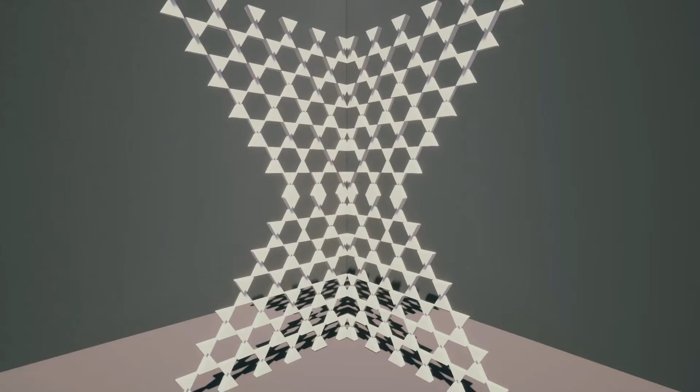Thinking of a problem, an issue, a situation, or condition within the bounds of the built environment, we came up with Pollutile. This is a simple construction material to give answers to our chosen problem in the community condition, which is smog.

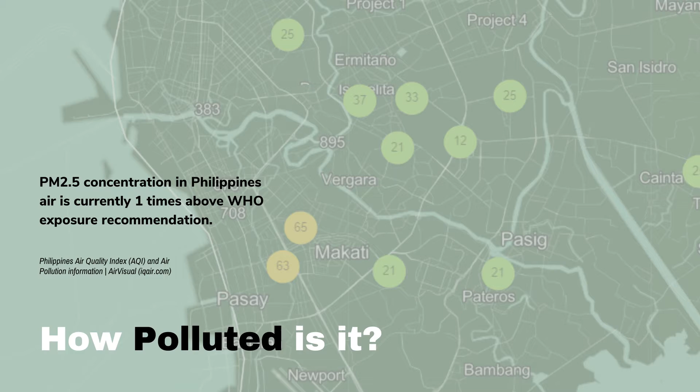Heavy pollution, such as smoke fog, in major roadways in the Philippines harms the environment and the people every day. According to AirVisual, the Philippines has moderate pollution with PM2.5 concentration. Philippines air is currently 1 times above the WHO exposure recommendation.

And as of August 5, 2021, the Live AQI City Ranking ranks Quezon City as the most polluted city in the country, followed by Makati, Naga, Davao, and Batac, Ilocos respectively.

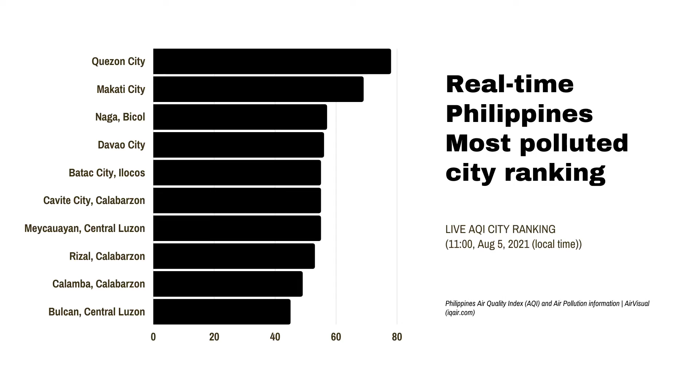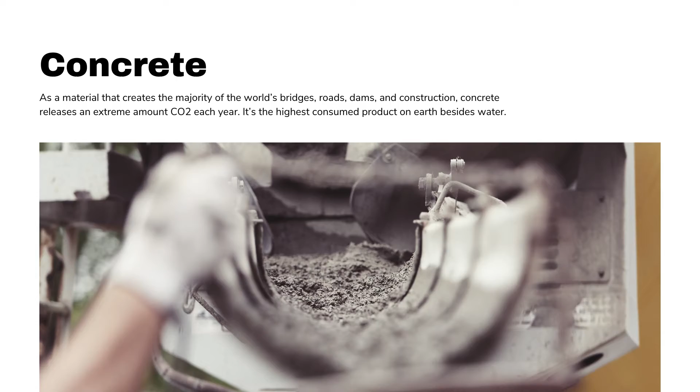Our chosen material with potential for innovation is regular concrete. Concrete production is responsible for 8% of global greenhouse gas emissions, and as populations continue to grow, demand for concrete continues to rise.

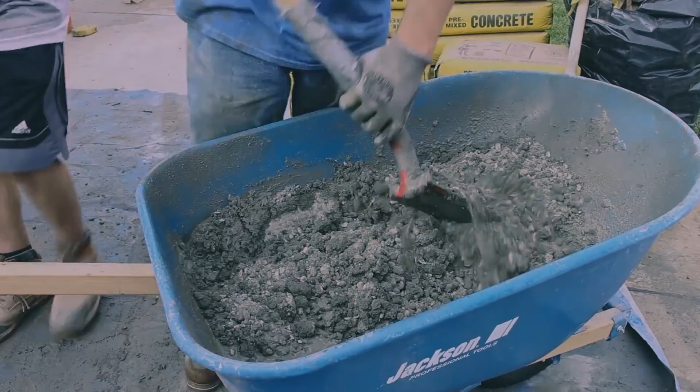In order to evaluate the environmental impact and resources used throughout the production and application of the material, here's the life cycle of a concrete, starting with the exploitation of the raw materials and ending with the recycling or disposal of the demolished concrete. Basically, it addresses the environmental impacts of the concrete from the extraction and production of raw materials, and also the production phases of the concrete with the choice of the most suitable mixture for a particular strength and situations of use. The end-of-life scenario of CRC, or the completely recyclable concrete.

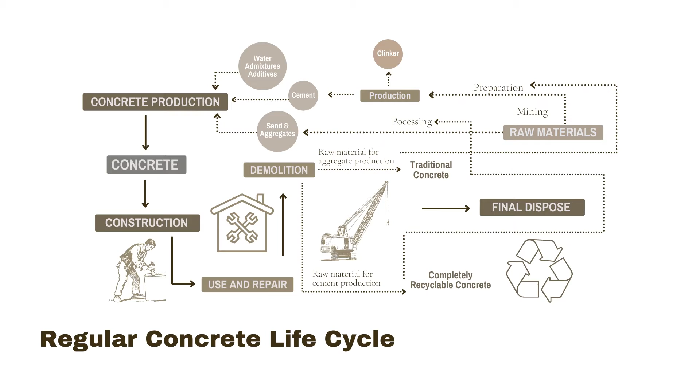All concrete waste is recycled within the cement production process, while for the traditional concrete, the waste scenario was divided according to 2 alternative routes, which include the recycling as concrete aggregate and the final disposal. So overall, the environmental impact of the concrete production process was found to be strongly related to its binder content and its required transport.

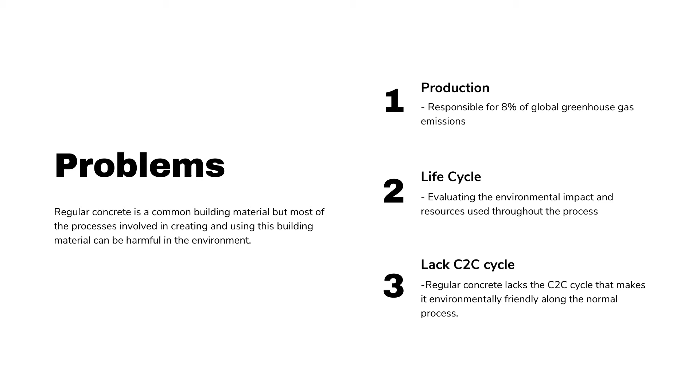Knowing the properties and life cycle of our chosen material, we break down the problems into 3 points. First, product-wise, concrete is responsible for 8% of global greenhouse gas emissions, which is concerning nowadays, especially since the world is at high risk of global warming. As we evaluate the environmental impact and resources used throughout the process, we realized that the procedure in the life cycle of regular concrete could not be reused or repurposed again, which leads us to our last point: that regular concrete materials lack a C2C or cradle-to-cradle cycle to reuse the concrete again and return it to the earth.

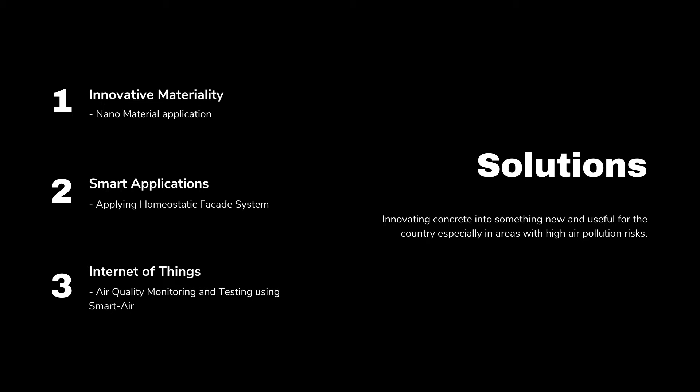To answer these presented problems, we will give 3 keys that would be essential for a proposed innovation with regular concrete material. First, innovative materiality, which involves nanomaterial application, which in theory would play an important role. And second, by also integrating smart materiality like a homeostatic facade. And lastly, third, in the wake of the digital revolution, we will apply Internet of Things, particularly air quality monitoring and testing using applications like Smart Air.

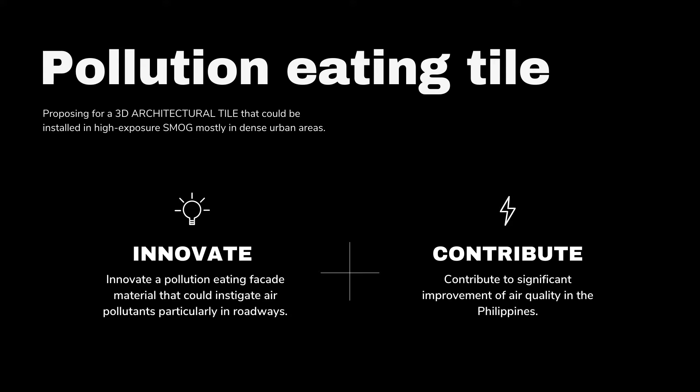Thus, Atelier A aims to innovate concrete into something new and useful for the country, especially in areas with high pollution risks, by creating a pollution-eating facade material that could mitigate air pollutants, particularly in roadways, and contribute to significant improvement of air quality in the Philippines.

Introducing nanomaterials to Pollutile, we explore photocatalytic concrete with titanium dioxide. This is fabricated by adding the photocatalytic titanium dioxide into conventional concrete. And this can help remove air pollutants, providing clean air in our cities and towns.

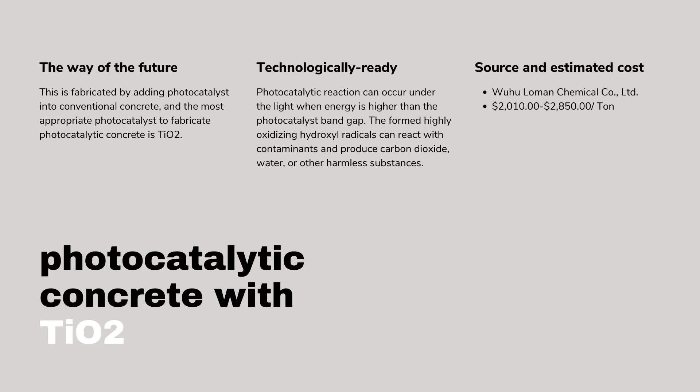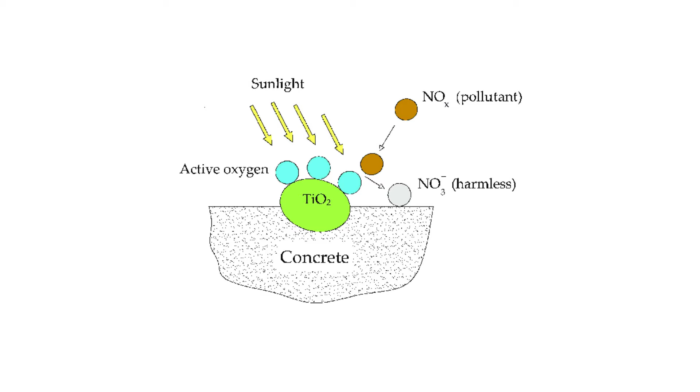Integrated with superfine titanium dioxide, which is a white permanent pigment, popularly used as a raw material in several downstream industries such as paints, paper, toothpaste, plastics, inks, and other products. Due to its whiteness, opacity, and refractive index, titanium dioxide is an important component in paints and holds about 25% share in the total content of paints.

It is a chemical that can remove 88 to 97% of nitrogen oxide pollution from the atmosphere. Photocatalytic reaction can occur under the light when energy is higher than the photocatalyst bandgap. The formed highly oxidizing hydroxyl radicals can react with contaminants and produce carbon dioxide, water, or other harmless substances.

This material could be sourced in the market through importation of titanium dioxide from Wuhu Loman Chemical Limited Company with an estimate of $2,010 to $2,850 per ton.

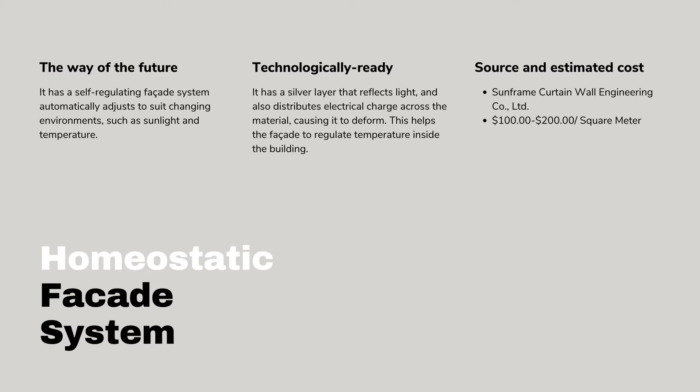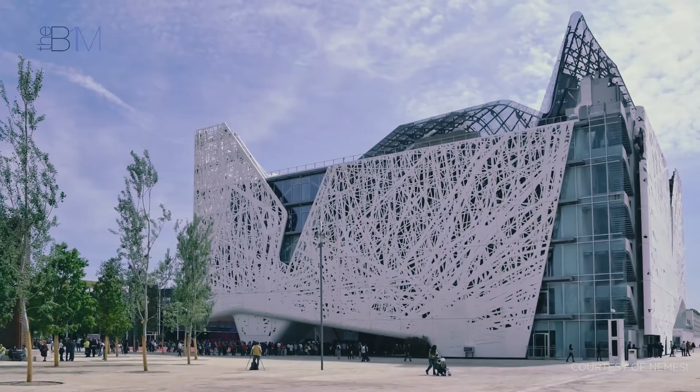Applying smart materials to Pollutile, we incorporate the concept of homeostatic facade system. It is inspired by the compression of human muscles and homeostasis in biological systems. Homeostatic facade system regulates the building's climate by the process of self-shading. It has a silver layer that reflects light and also distributes electrical charge across the material, causing it to deform. This helps the facade to regulate temperature inside the building.

Pollutile could be a component for an interactive wall collecting smog data on highly exposed surfaces. This could be locally sourced and made through companies like Sunframe Curtain Wall Engineering Company Limited, costing about $100 to $200 per square meter. As we go on, we explore the potential opportunities with the Internet of Things.

This is the interconnection via the Internet of computing devices embedded in everyday objects, enabling them to send and receive data. It is the process of sampling and testing of air emissions. It helps to understand the quality of air by pollutants over a period of time. It also gives trends and patterns about air quality, whether it is improving or degrading.

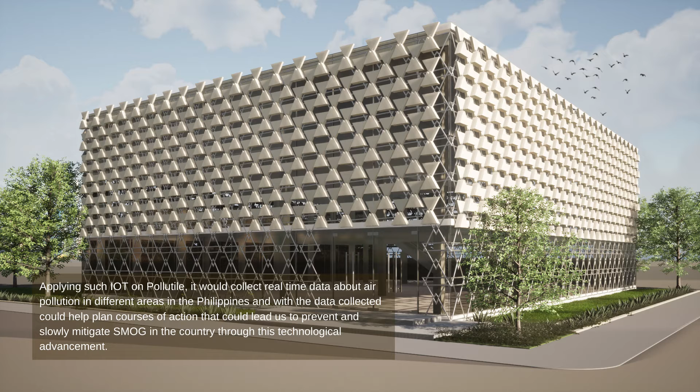Smart Air has been developed based on the IoT technology to efficiently monitor the air quality and transmit the data to a web server via LTE in real time. The device is composed of a microcontroller, pollutant detection sensors, and LTE modem. An application was developed to help in monitoring the air quality as well.

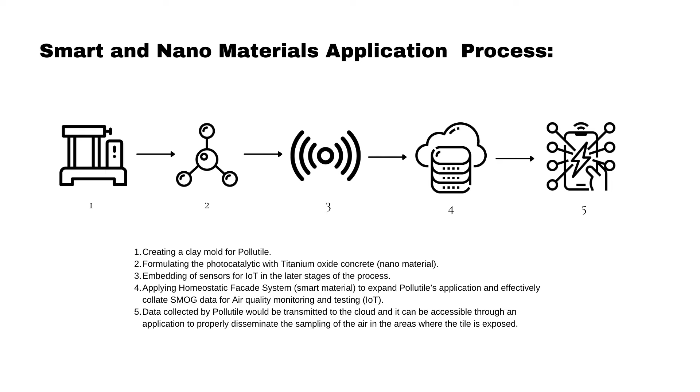So in general, these are the processes applied to further develop our innovative solutions. First, we create a Pollutile clay mold. Then use titanium dioxide to make the photocatalytic concrete. In the final stages of the process, the concept of Internet of Things will be applied by embedding the sensors.

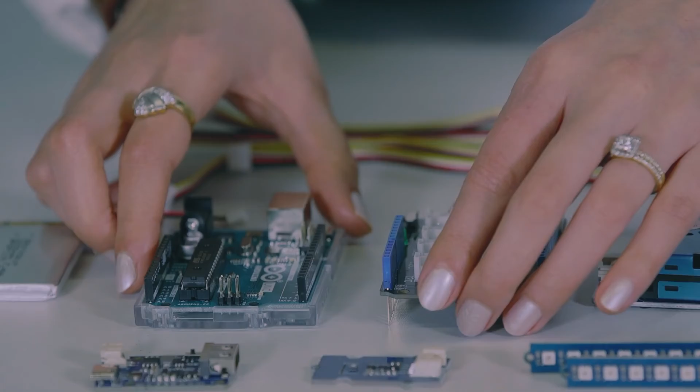Then expand Pollutile's application and effectively gather smog data for air quality monitoring and testing by using the homeostatic facade system. Pollutile's data would be sent to the cloud where it could be accessed using an application to effectively disseminate air sampling in the locations where the tile is exposed.

These are the common dimensions for our Pollutile. It could be applied regularly like a tile or could be suspended through air to catch smog.

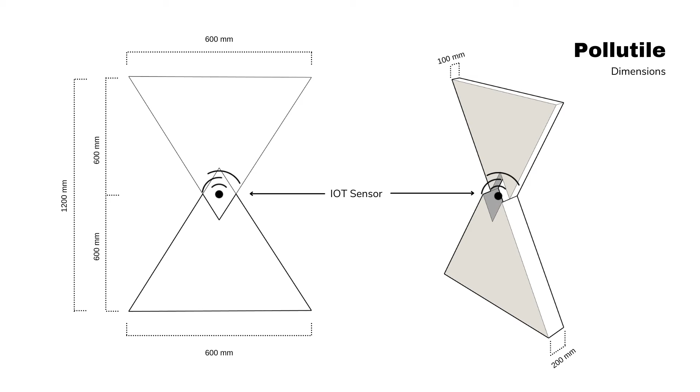Now here's the proposed facade system, integrated with a combination of different responsive materials in order to address the problem within the built environment. The innovative facade is composed of the Pollutile itself, which is coated with titanium dioxide that has the ability to turn pollutants into water vapor and carbon dioxide when sunlight hits its chemically treated surface. Each tile was designed to contribute to its overall durability, design aesthetics, and sustainability.

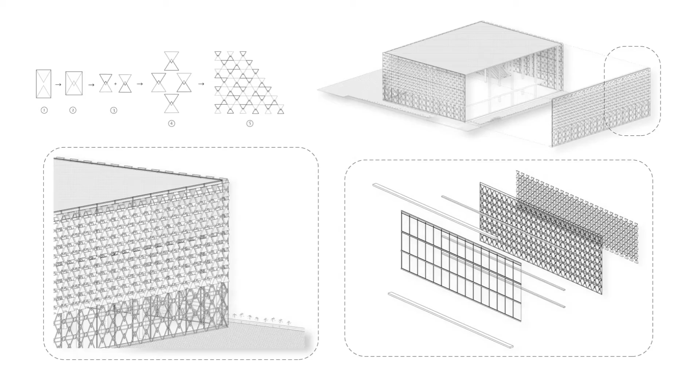In addition to that, the facade not only addresses the environmental impacts of the pollutants, but also regulates the building's climate by applying the idea of homeostatic facade system, which responds to its environmental conditions. This system is composed of double skin facades consisting of interior and exterior glass walls with a simple air cavity embedded with louvers.

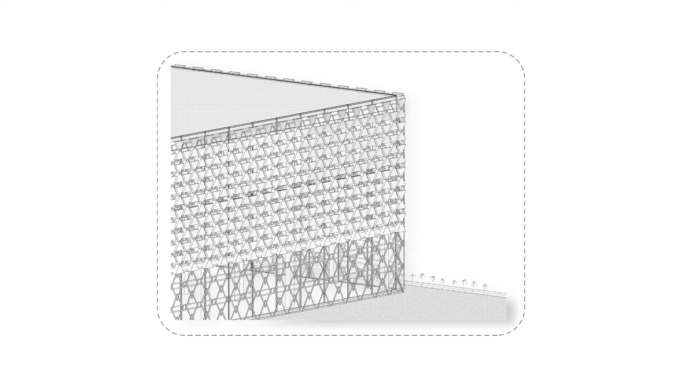It includes mechanisms in response to the internal temperature of the building that enables the system to automatically regulate heat loss and gain while saving energy. Altogether, the proposed facade system allows the structure to blend with sustainability by integrating smart construction techniques while also translating innovative solutions to its form, having those triangular-shaped modules designed to maximize the surface area, control the building climate, and therefore increase the efficiency of this innovation.

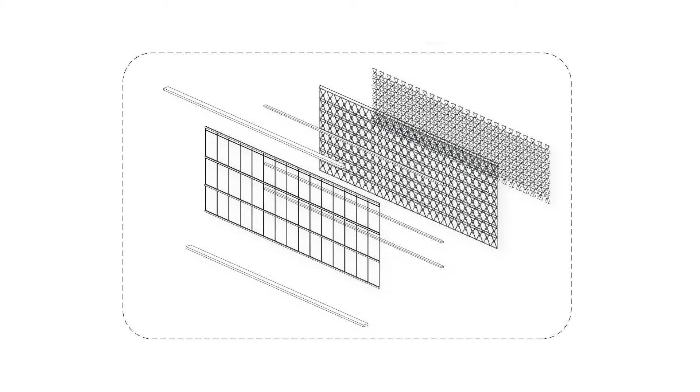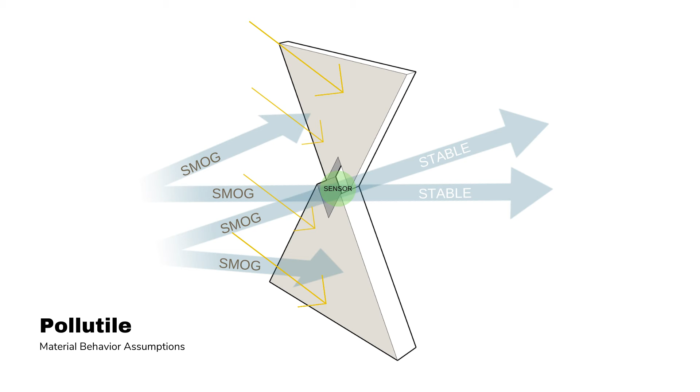When it comes into contact with smog air, Pollutile surface will have reactants that would help create stable compounds in the air. This is made possible when the titanium dioxide is exposed to ultraviolet radiation from sunlight. Further explaining this concept, as you can see in the diagram, when titanium dioxide is exposed to ultraviolet radiation from the sun, it absorbs radiation and electron excitation occurs.

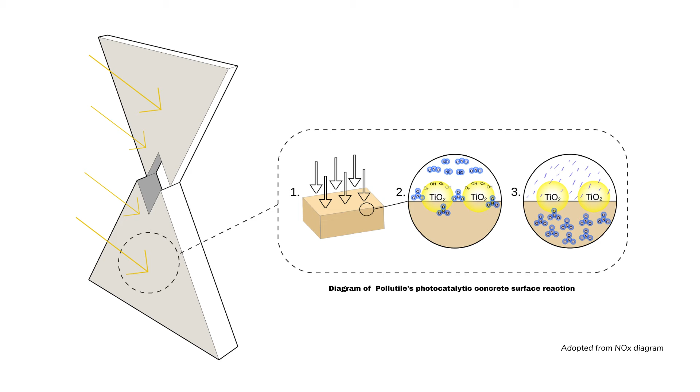First, ultraviolet radiation is absorbed by the titanium dioxide, which causes the photolysis of water into superoxide ions and hydroxyl radicals. Second, nitrogen oxides react with the superoxide ions and the hydroxyl radicals to form nitrate ions. Third, the nitrate ions are absorbed into the block and form stable compounds.

TioCem, produced by Heidelberg Cement in Germany, is currently the most popular titanium dioxide cement on the market. The procedure is similar to that of regular Portland cement, except that the titanium dioxide mixture is mixed in with other components in the final powder. Flexural strength, compressive strength, frost resistance, and absorbability were all tested on the TioCem to ensure its integrity.

The pressure applied in megapascal at the point of failure can be seen on the data collected in the first table. In the compressive strength test, the concrete block was placed vertically under a hydraulic press and pressure was applied on the failing point. After 2 days, TioCem was able to withstand much higher pressure with an additional 1.1 megapascal in the flexural strength test and 11.8 megapascal in the compressive strength test.

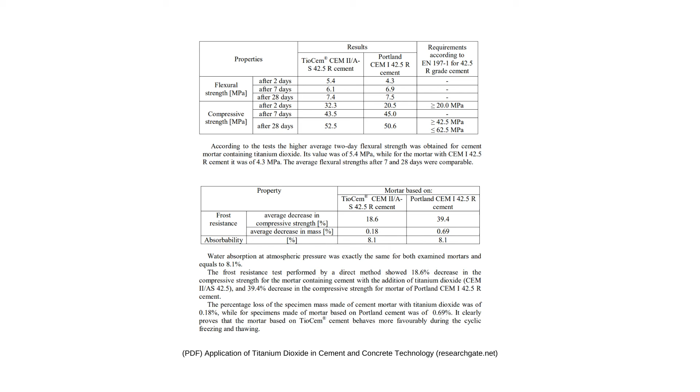These tests show that adding titanium dioxide into concrete has no detrimental impact on its strength and that it still passes all standards. The sample was placed in a basin with a tiny amount of water with only one side surface of the block exposed for the absorption test. Over a period of a week, data was collected to see how much water was absorbed, and both the TioCem and Portland cement samples had an absorbability of 8.1% in this test.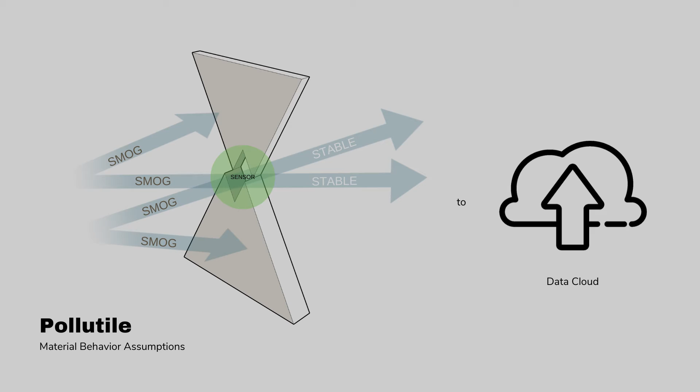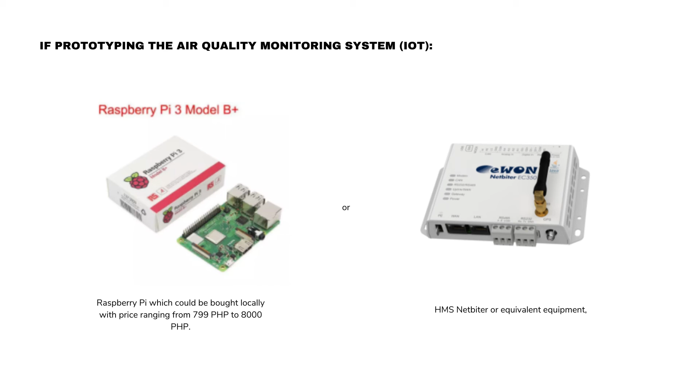For the final IoT solution, properly calibrated high-quality sensors and industrial IoT gateway devices, such as HMS Netbiter or equivalent equipment, are targeted. Next, we plot down the cradle-to-cradle cycle for this product Pollutile. First, we start by creating a mold using recycled materials if we can. Then, we pour our photocatalytic concrete, and after this process, we coat it as well with titanium dioxide. By this step, it is ready for application to building facades, public areas, and mostly areas exposed to smog pollution, together with the sensor nodes.

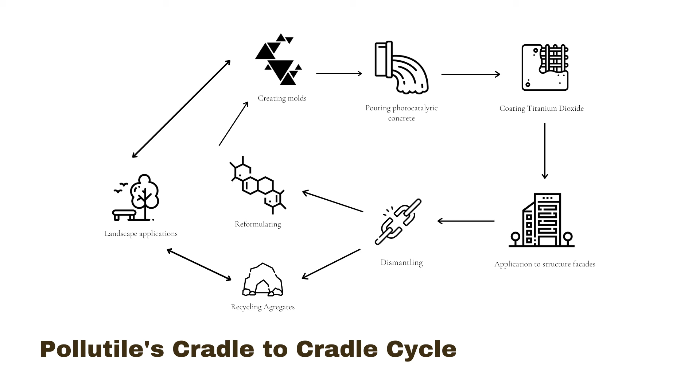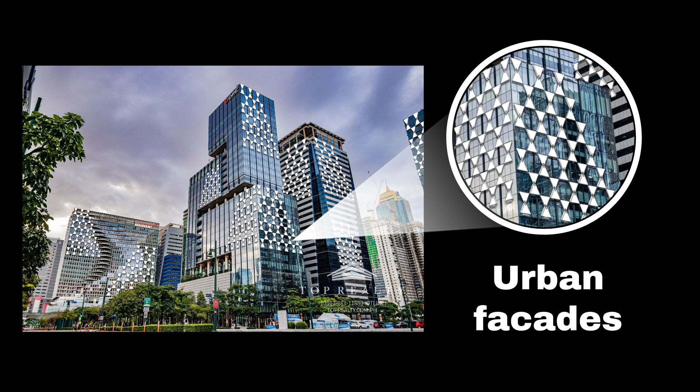After the recommended time duration for Pollutile, we proceed to dismantling, which leads into 2 ways in this cycle. The first part would be reformulated again into a Pollutile product, and the latter could be applied in landscaping to add texture to our landscapes. It can be applied in major roadways in the country like EDSA, Commonwealth Avenue, and Makati. Next, it could add interest and adornment to smart building facades exposed in polluted air environments. And lastly, in public spaces where people could enjoy less polluted air through Pollutile.

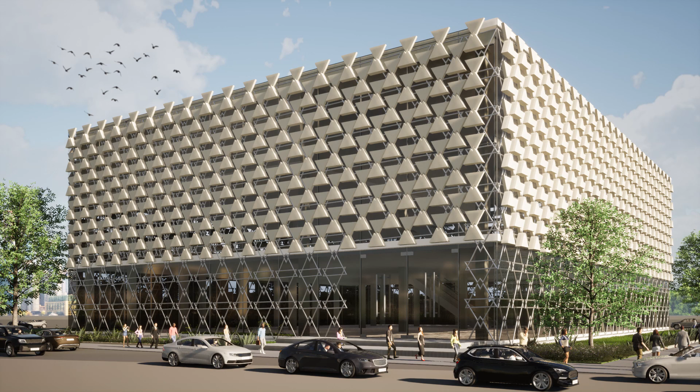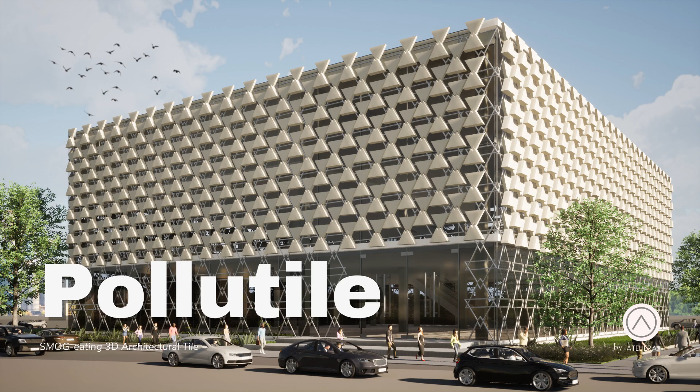Here are some rendered illustrations of how the Pollutile would look. This is Pollutile's innovative processes and ideations in hopes of giving answers to the alarming effects of smog in our country through creating this building material with the help of modern technology as our advantage.